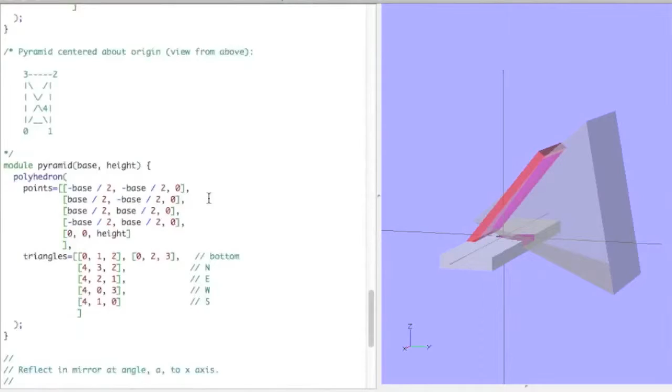So first you have to describe a three-dimensional object. Now it looks like this is kind of like a lot of computer code over here. This is describing the actual object we're seeing on the screen on the right-hand side.

This is kind of the top-level module, the assembly, and you see what it's doing here is it's taking a base, and I can highlight that by putting this little pound sign in front of it, and you can see in red that's the base.

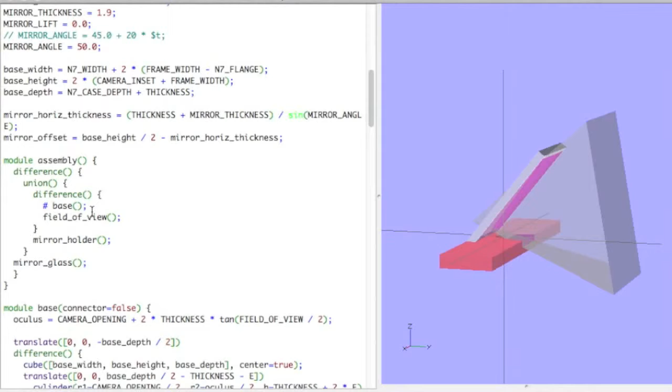And then we draw onto it the field of view. So this is not part of the part itself, but it's just showing us what the camera sees. There's kind of a virtual camera behind the mirror here, but this is the angle that the viewer would see.

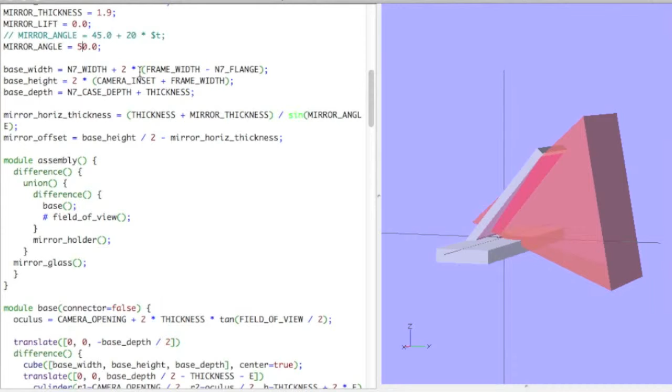One of the things we were playing with was different angles of the mirror. So I can actually go change the angle of this mirror to say 45 degrees and then redraw that. You see that there's coming straight out, and that's what it looks like at just a pure 45-degree angle.

But it's intersecting the base quite heavily there, and it's going to clip the view. So we adjusted it to be a 50-degree angle, and then we can remove just a little corner of the front and get an unobstructed field of view from this mirror adapter.

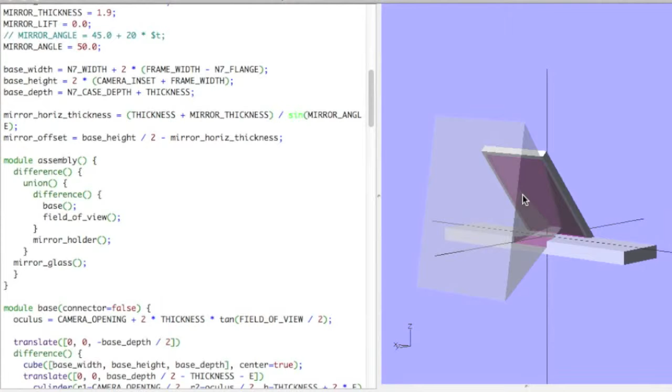And you can see the sight lines go all the way to the corners of the mirror that would be inserted here, but they don't hit the corners. And Frank said he's tested that, and that does appear to be what it's doing.

Then you can look down here, we have a mirror holder. That is the back part - actually will be the place where you glue the mirror on.

This is just another - this is where the actual glass will fit in itself. That's where the mirror glass goes, just as an indicator. So that's how that works.

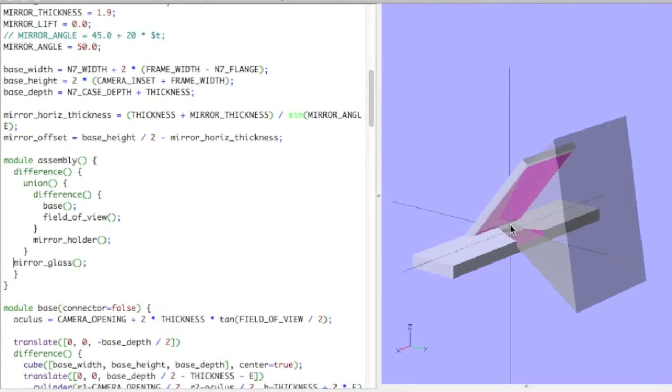And I'll show how we actually print it. So here's the actual program that comes with the 3D printer, and you can see I've loaded in the mirror onto the bed of the printer.

This tabletop represents what the printable area is, and this is what it looks like if it's just sitting there.

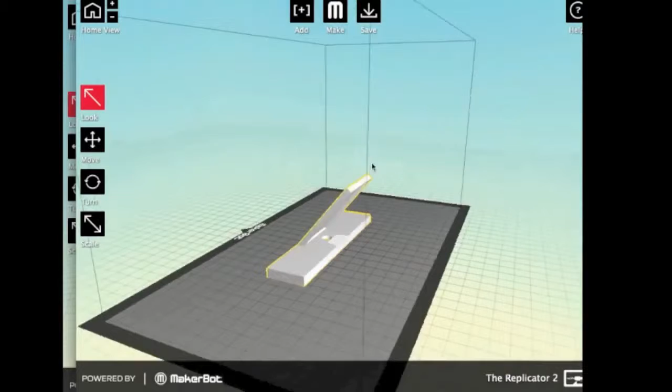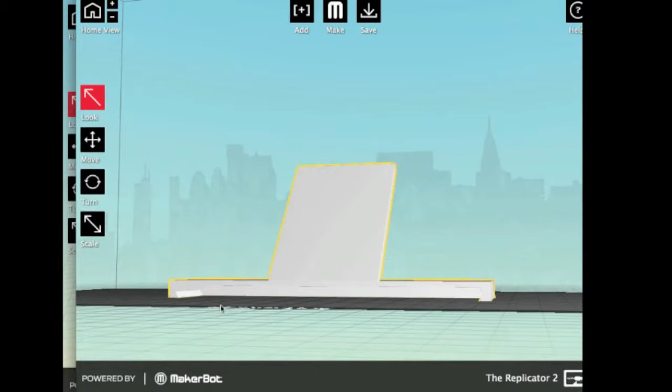Now, unfortunately, when you have a 3D printer, you can't print arbitrary shaped objects. There are some restrictions. One of the problems is, like underneath here, you see that there's a large air space, and the printer actually won't be able to print inside of that because it deposits plastic layer by layer from the bottom, and it'll deposit stuff out here in space, and it'll fall down.

So there's nothing underneath it to support it. But with this part, we've designed it so that there is another orientation you can use, so if we actually rotate this part around.

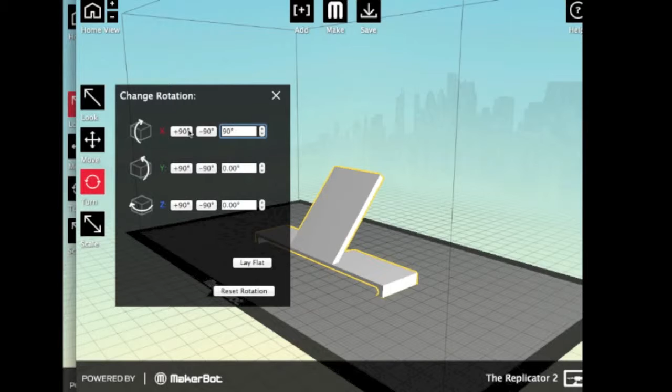I'll first do 90 degrees like that, and then another 50 degrees, I think. Maybe that's not quite right, but I can just say lay it flat. There we go. So now when it's in this orientation...

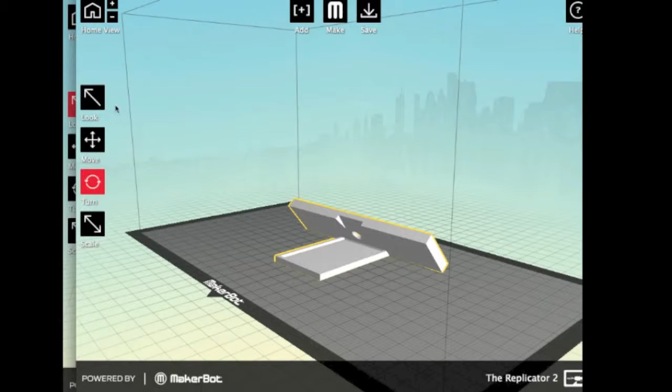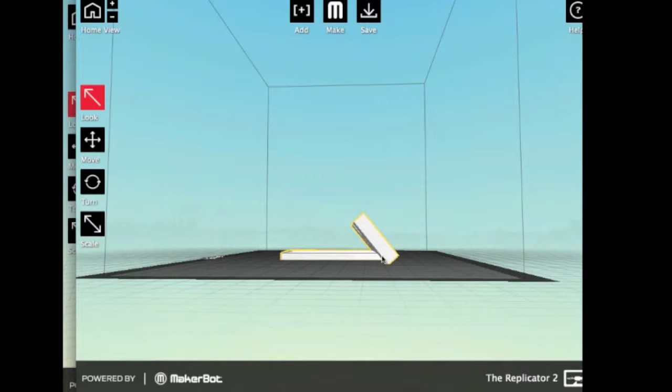Actually just move it around, you can see it'll actually print. There's no gaps here, and the printer can print a 45-degree line just fine - or this is actually maybe a little bit less than 45 degrees, but it will print okay.

So this is the way we're going to print it. And then when you go to print it, you set some parameters about how much resolution you want to use and how much material to use on the inside. We're going to fill the interiors with a 10% honeycomb pattern. And then they give you a preview as well.

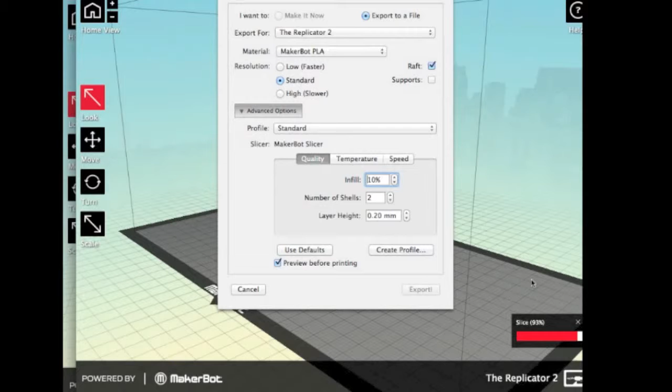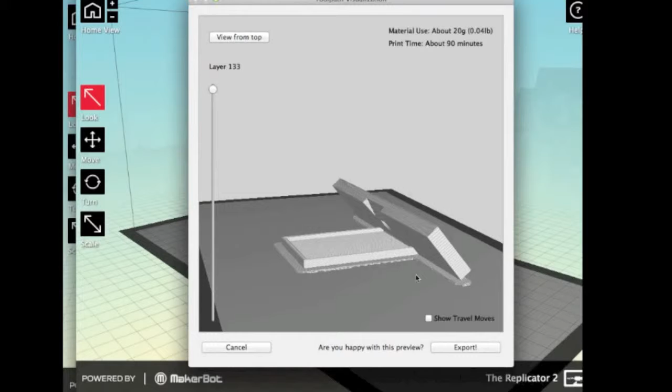So this is kind of cool, where you can see what the part will look like as it's being printed. I print this thing called a raft underneath it, which is just like a bed of plastic that surrounds the part. That helps make it easy to remove from the print table, and also helps hold it pretty rigidly. This is a long part, and sometimes the plastic has a tendency to curl up on itself and detach from the table while it's being printed, so this raft helps with that problem.

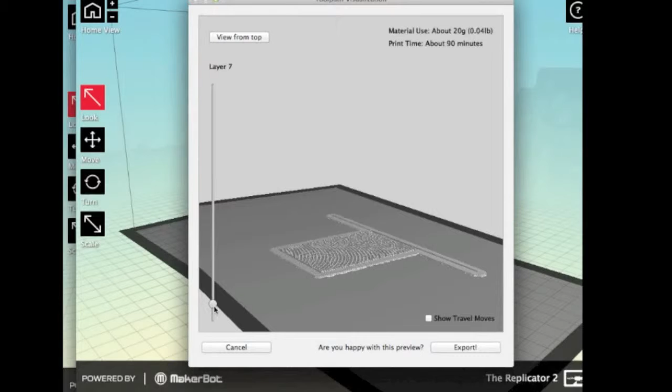And then you can actually preview it, so here you can see kind of what the print actually looks like. If you start from the bottom up, you can see it's printing the raft layers, and then it starts printing the actual part. This is layer by layer, each little slice horizontally across the object. The printhead will go and make each of these slices all the way up until it lays up the entire object.

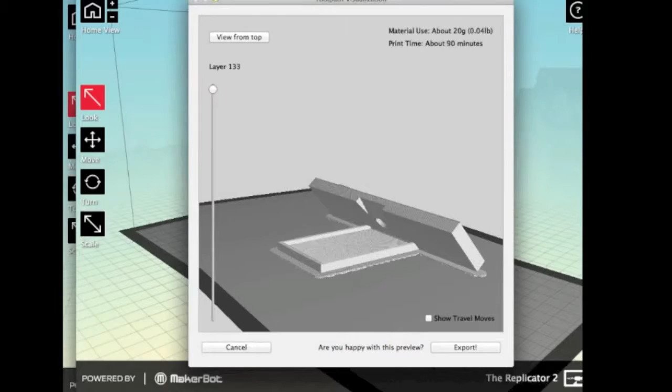And the way it works is that it uses plastic like this. You have these spools of plastic filament, and you put those into the printer on the back side of the printer. It just feeds from a spool back there up onto a print head, and it melts the plastic inside this print head and deposits it on the table.

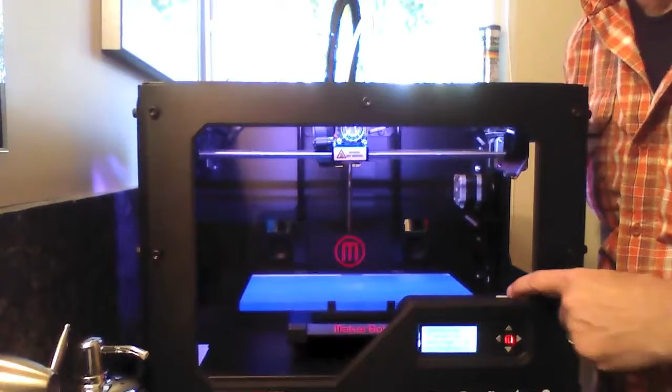Okay, so now I've copied the file into the little SD card here and brought it over to the printer, and we can start printing it now.

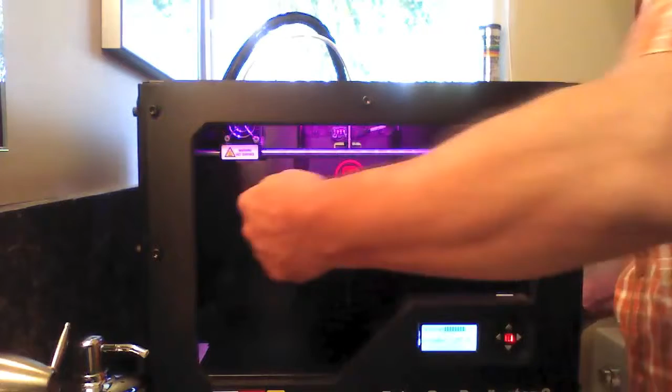So it has to heat up the filament first. Then it draws out a line of material just to make sure the printhead is flowing properly. And then it goes into the middle and it starts actually drawing - in our case, it'll start creating the raft for the part that we want to build.

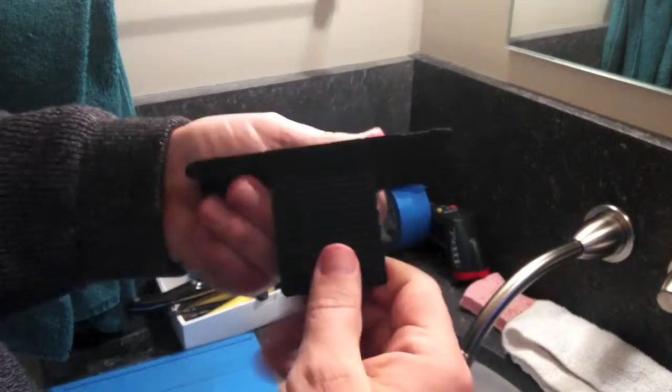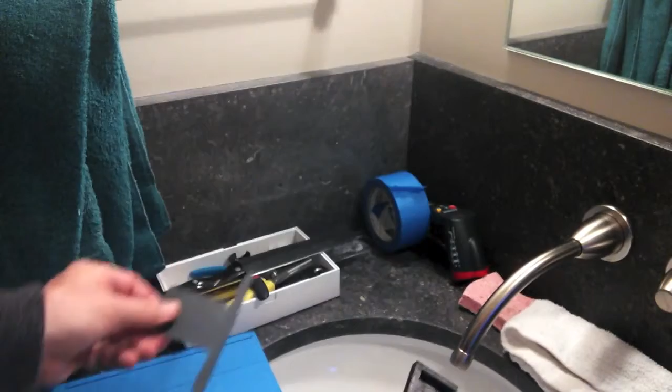Alright, now here's the final part that has just come out of the printer, and you can see it has that raft printed underneath it, so you have to peel that away, and it's generally more or less pretty easy to come off. It sometimes sticks a little bit to the base. There we go, I think that came off pretty well. There's the raft part. And here's our finished mirror holder.

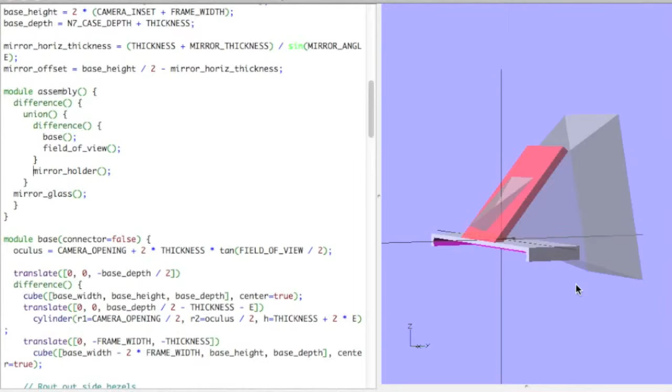Uncle Frank and I did some design modifications, and we've been elaborating on this and improving the design over the last month or so. The point of this is to sit on top of a Nexus 7 and provide a mirror for the front-facing camera, so it can be used as a rear-facing camera. So this is about the design of a mirror holder that slides and fits perfectly over the Nexus 7, and will hold a mirror over the camera so that you can point it this way at anything.

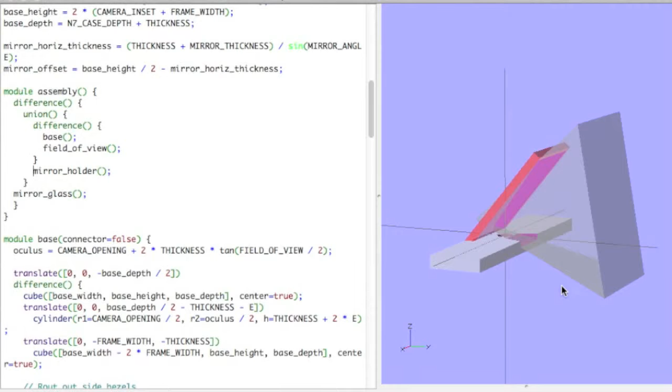So I wanted to show a little bit about this Nexus 7 mirror holder that we are designing and 3D printing. This video is going to show how we design and then build a plastic part that is going to be a mirror holder for a Nexus 7 tablet. And the older version of the Nexus 7 tablet only had this front-facing camera.